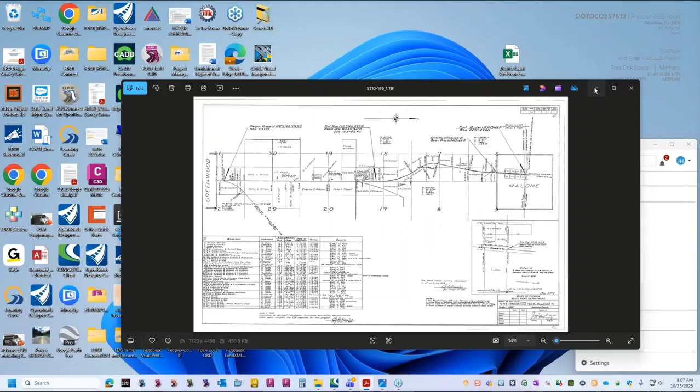So with that, let's see, I'm going to just move this over for a moment. I've got a couple of maps here, but I'm going to start ORD fresh because I don't want it to crash.

While that's cranking up, I'm going to put this up here and talk a little bit about the COGO.dgn. The COGO.dgn is a new file that we added to the 2024 workspace.

The reason we created this particular file is because there's not really a good central place to put your COGO. From experience, we know that you create some COGO points in a master right-of-way file, for instance, or maybe in a jurisdictional model, the township models, or possibly a subdivision.

So you may be doing these in different models or different files and trying to reference them together to put together your map, and come back two or three months later, or have somebody come out behind you and try to look at it, and it's a puzzle where everything is. You find yourself spending so much time looking for where you did what and where it is, that it gets complicated.

And so some consultants have tried using a COGO file and said they like keeping it all in one place. So we're just going to put this out here. This file may be used to develop 2D coordinate geometry for a specific project.

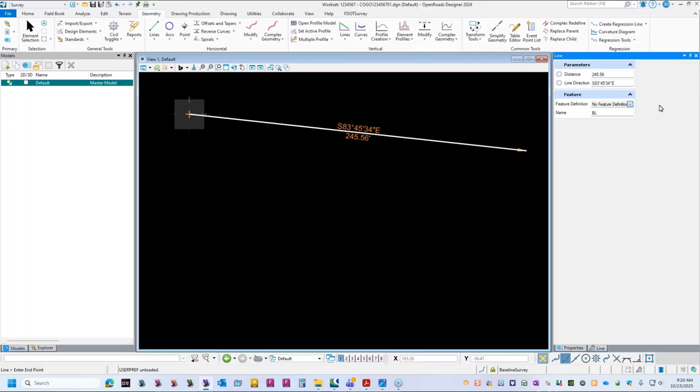So if I go over here and set my feature definition - sometimes it's a little slow - set my line, set my feature definition, I'm just going to make it a baseline for the moment. It does accept names, you can name them 1, 2, 3, 4, or you can name it BL1 for instance, and it will increment from there, or increment from BL. Managing point names and linear feature names is important, but for this process it's a little time consuming, so I'm just going to let it name whatever it wants to name it.

Okay, so I'm ready to draw a line. I can do that by just going right across here like this. And here's a line, a couple hundred feet long.

And then with that, I'm going to place a point. So over on my point tools, if I just select this top point, it's going to place a point. As you can see over here, it'll offer you an elevation mode, a rotation mode - if you want to rotate it, you can rotate it on the fly. I'm just going to choose a monument here, go down, choose from your list, and I'll choose a monument. I'll stick a monument over here, and I want to put one maybe up here.

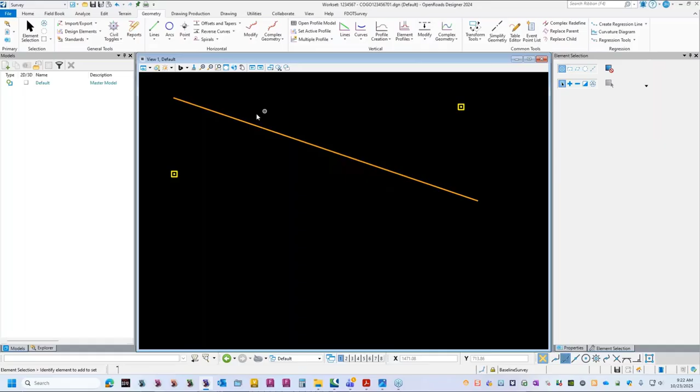I want to demonstrate the concept of move to and what was moved. In this case, I'm going to move this line. I'll select the line, grab the handles... let me do this. Select the line, grab the handle, and move it to the monument.

Notice it puts a little diamond up there, and to the upper left of that diamond there's a small ruler icon, which means I'm setting a rule. That's basically what it means.

If you look down at my button bar, right here, this is an origin snap. If I select that, it'll do the same thing if it doesn't do it automatically—it's going to snap to that line, snap to that monument. So I just moved the line to the monument, meaning the monument now controls the line.

For the other end, I'm going to do the opposite. I'll select this monument right here, move it down, and stick it on the end of this line. You saw it was ruled also.

So what happens is, if I move the line that I moved, it's not going to move the monument. Undo. However, if I move the monument—select the monument, and get to it... it's having a hard time just selecting that monument. There it goes—and I move the monument, notice it moves the line.

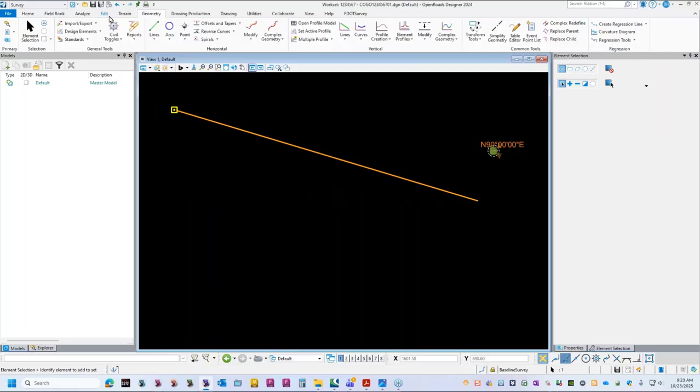Down here it'll be the opposite. If I move the monument, it will not take the line with it, but since I ruled the line to the monument, and ruled the monument to the line, when I move the line, it moves the monument.

One other thing I wanted to demonstrate here was the offset point tool, and I'll just do that real quick. So let's see, I'm going to put a point...

I'm going to use another tool called Civil AccuDraw to do that. So here's the Civil AccuDraw, and I normally dock that up here.

Another tool I wanted to mention is the Feature Definition toolbar. I usually dock it right here and leave it up top, along with the Civil AccuDraw. The Feature Definition toolbar lets you set the feature definition for what you're drawing and keep it current.

So I can say, for instance, put it on baseline, and if I select my line, it'll say I chose baseline over here. But if I turn on 'use active definition' over here, notice it grays out over here, so you don't need to choose your feature definition there.

It's in your toolbars now. These are for linear elements, and it'll affect things when you least expect it, so pay attention. If you have this turned off, you can set the feature definition here. If you turn it back on, it takes it from this spot.

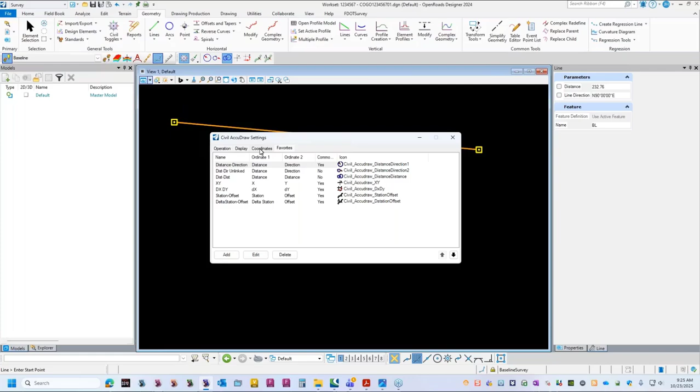You can actually add some custom settings, like offset, for instance. I'll close that. It has some other tools: a distance direction tool, a distance direction unlinked so they won't dynamically link to each other, a distance tool where you can just place a point, one where you can place it by offsets, and a station offset tool to place a monument.

And that's what I was going to do right here. I'm going to use this particular tool and hit point, and now it wants to know the station—but it doesn't even know that I have anything out here.

So what I'm going to do is create this baseline feature into an alignment by starting a station here. I'll start the station at 0, and just make it 10 plus 00 for now. So it's a stationed alignment now—if I look at it, it'll tell you it's 10 plus 00.

This is large because I set the manipulator settings to 1.5. Otherwise, it'd be little bitty.

And I'm going to use this tool again. So where's the station? If I hit the O button, the O is the origin button, and I'll hit O. It says select reference element to reset to return to command. My reference element is going to be this alignment.

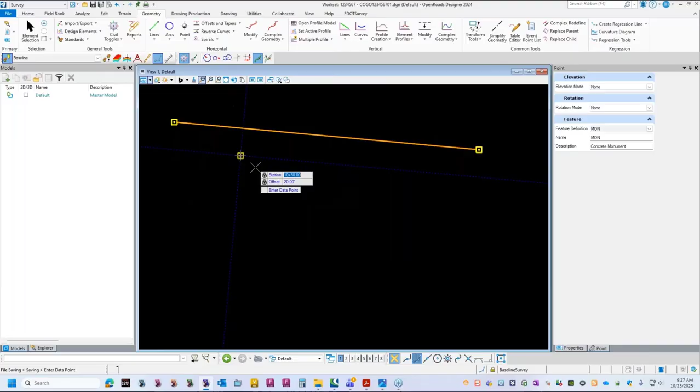So now it puts these guidelines and asks where on the alignment you want to put it. I'll put it at, maybe 10 plus 50, and hit enter, and it'll lock it. If I want maybe offset 20 feet, it'll lock that. As soon as you move your cursor, it locks that place, and I can put it there. Notice the dynamic link to this alignment.

If I don't like the 20, maybe I'll change that to 30. So just a demonstration of some of the dynamic links that ORD does and how it works. You need to be cognizant of it, because these can help you and they can cause you problems if you're not aware that they're happening. You may have an alignment that you move that has all the points linked to it, so the points will go with it. On the other hand, they may not be, and you think they are, and next thing you know, you've got a mess.

All right, so open roads models is one of the things I wanted to mention. If I go over to my Explorer tab down here, bottom left, I've got my Explorer ready, and I go to open roads models, you'll notice I have some points, and I also have an alignment. There's the alignment, and if I select it, it actually selects it, so it's another way of selecting.

But you can see I've got some points out here. Sometimes it takes a little bit to update these points. I've noticed my point 1, my monument point, is missing, but coming back and forth you'll eventually see it. And those are, let's see, so that's the open roads model.

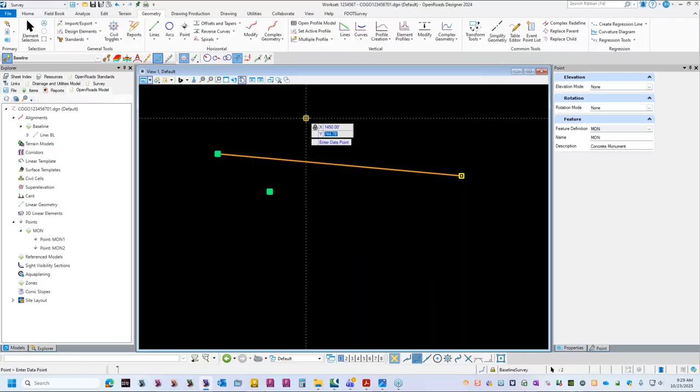If you're not using it, you want to keep it off. Oh, by the way, the one other thing I wanted to mention on Civil AccuDraw is this one right here. I actually had a consultant say there's no way to put a coordinate in ORD. Well, certainly there is. If you have Civil AccuDraw located, you choose this XY coordinate, and you can type in a coordinate. So I can type in 1450, hit the lock, 750 for instance, and it's going to put it right there. So that is a way to type in the coordinate.

You can also copy and paste from, say, an alignment report right in here and put all your points out and build your alignment, for instance. With that, I'm going to delete these points and this and the chain. I'll turn off Civil AccuDraw, and I want to talk about another tool called the Geometry Builder.

It's right here, this is the geometry builder. Going across from left to right, you can open a file, you can save a file, you can save the file as. This is where you add new geometry. These I call events, geometry events. You can copy and delete those events, and that all affects over here.

Going across, let me go ahead and just hit this tool. Whenever you start a new geometry event, I'll select this. It'll place this up here and get your lines and everything ready to go. Note that you can put multiples, I could have as many geometry events as I wanted. And if I had data in this particular event, or say event 4 for instance, I could hit copy and it would copy it exactly. So you can also delete them and just have 1 or 2.

In this case, I'll delete it down here and I'll just name this SR 71, State Road 71, for instance. Going across this direction, this is where you set your bearings in degrees, minutes, and seconds, as opposed to decimal for instance. And here's your units.

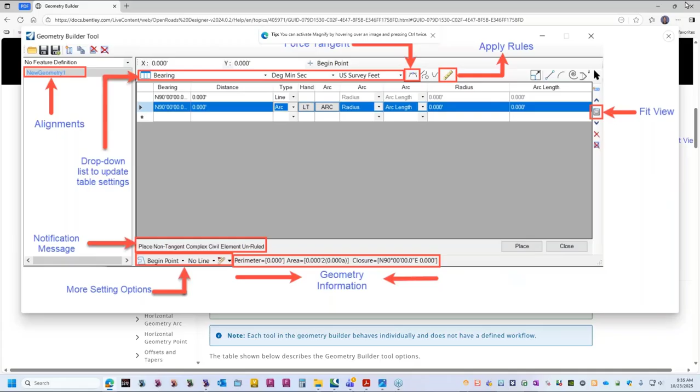So I'm going to close this help, just to show you that that's where you can get some help.

I'll come back over here, and the next thing I was going to do is review right-of-way maps, State Road 71 and State Road 164, and I have those right here. I'll start off with State Road 71, put it up here. It is a north-south - if you look over here, here's the north arrow right here, and it's moving north to south, and I'm going to rotate it back, just make it easier to read.

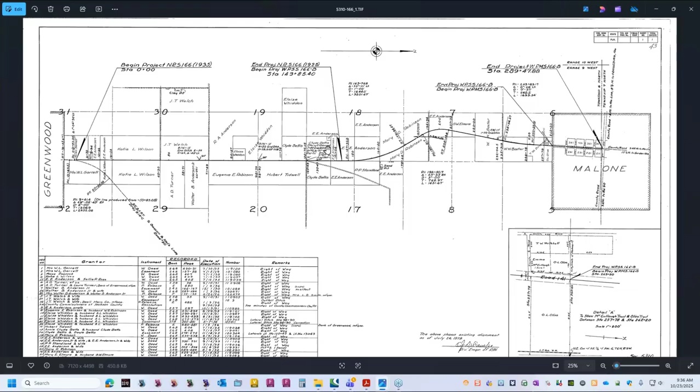So there's your north arrow going to your right. We're going to begin at this project beginning right here, this begin project, station 143.8540, and you'll see that it immediately goes into, just a few hundred feet away, a point of curvature, 147.32.3, and then it has curve data, more PTs and PCs for tangents, and more curve data all the way to the end.

One of the things I wanted to note on this, I'm going to bring this up to show you - in this map, there's an error. It's hard to say exactly where the problem is, but if you look at this particular curve, you see 190 plus 81.7. So I'll put in 190, 81.7, and I add to that the tangent length, 762.97. 762.97 equals 19,844, or 198.44. He has 198.50.7.

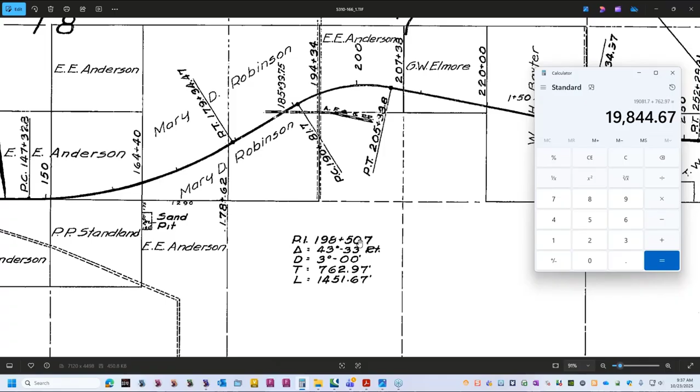So there's about a 6 foot, 5.5 foot... well actually it's about 6 foot because this is 7.2. So you're seeing a 6 foot error in here, and I'm not quite sure it was.

What happens is, as you move forward in this map, you're going to end up with a problem at the end station. It's something we could figure out, and probably would need a little field work, and there's been some field work done out there. So that's all probably been reconciled at some point, but we're going to be taking off here near the PC of the curve, so that error is not going to really bother what we're trying to achieve here.

So what I'm going to do is take this map and start off in Geometry Builder and put in these calls. Let me close this.

So what you'll see is it says bearing. Well, I can put in quadrants. I really like using quadrants, I used them in my early career when we had calculators that did everything. So quadrant 1 is northeast, 2 is southeast, quadrant 3 is southwest, quadrant 4 is northwest. So if I put in 4 northwest space 45, 0.30, you can use decimals - let's say 30, 50. It's going to say north 45 degrees, 30 minutes and 50 seconds west. So it's really good at reading quadrants.

In this case, I want to go northeast, so I'm just going to go straight north - I'm just going to put 10 and it's going to be north. And I'm going to take this station here. Let's see, where is that station? Let me pull this over here and look at it. So we've got a station.

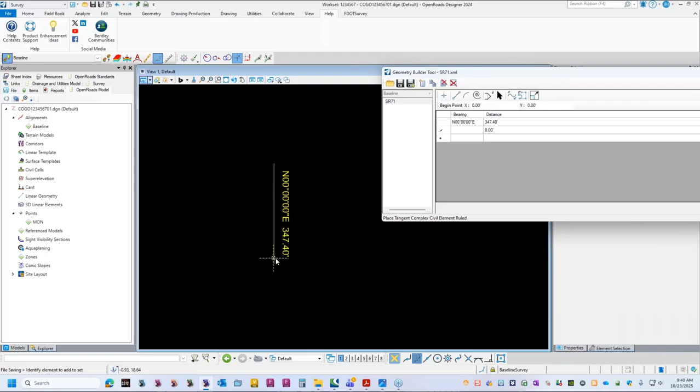And if I hit center here, it's going to center right there to this line, and you'll see it's starting at 0,0. Now notice this is not - if I select it right here, it is not. And I'm going to turn this graphics off just for a second. I'm in the decorations, just show it right here. So if it's here and I select it, it's going to highlight the color that's in that Civil View options, which is purple - this magenta color, and not magenta, but yeah, magenta.

Anyway, so if I enable the fit view, it fits it totally to the view. So now what I'm doing is...

I want to go into a curve, so let me show you this curve data. I'm going to go in here to 147.32, and I'm going to go a curve to the left. And here's my curve data right here. Okay, so let me pull this back aside just for a second.

So what happens is when you put in a curve and I drop this down to arc, it's going to compress this line. It's going to put all the possible curve data right here, and it's going to move my bar up to somewhere around in here. So I'm going to hit arc - you see it moved it, it put in all the top. My curve is going to be to the left, so that's correct - it's arc. You can put in chord or arc rules, but we're not a railroad, so we will use arc.

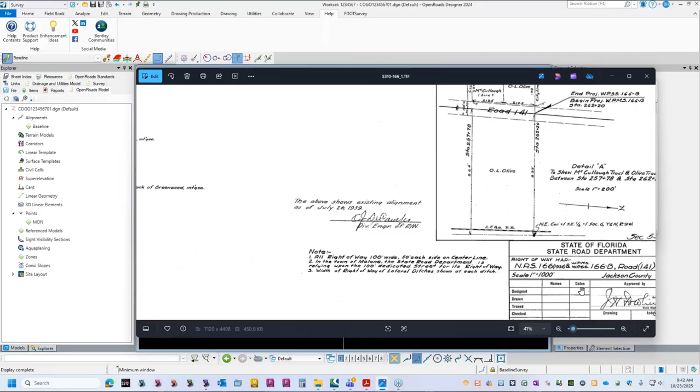And I'm going to put in a radius. Actually, what I'm doing - if you look, I don't have a radius. I'll talk about this just for a second. So this map was done in 1935, right there - okay, they didn't have the tools we have today. It was not easy to do these calculations. They had log tables, they had what are those, the rulers that they used, and they would come up with a really close estimation of these to a reasonable decimal point.

That's why on these old maps you only see degrees to the nearest minute, because they just could not calculate those seconds. You'll also notice there's no radius, because that was just about impossible to calculate accurately in those days.

In fact, the way they would build these curves, the party chief would come down. This may be a dirt road at some point, and he'd be set up right at the curve of the dirt road, and he would backsight down the tangent, and they would cut line all the way down this direction.

Then they would go do the same thing over here. They'd set up, backsight, turn 180 degrees, and cut line until they found the point of intersection of this curve between those two lines, then set up there and look both directions.

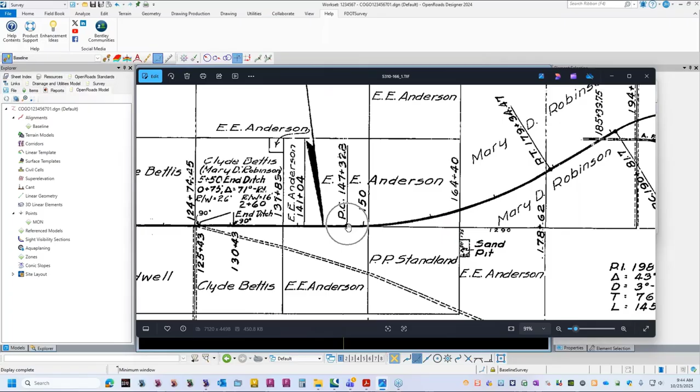That would establish the central angle of the curve. They needed a tangent distance too, so that distance from the PC to the PI where they were set up would be the tangent distance, and you can bet it was somewhere in the 1644 distance, and in the office they bring it back and make it 1644 even. That's a dead giveaway that it's a control type number, that it's a zero.

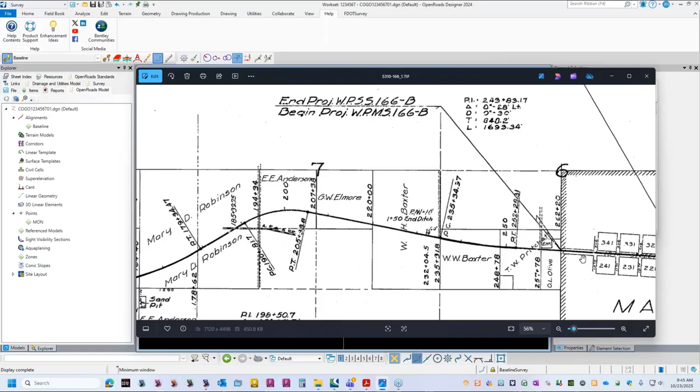Also, they would do the central angle. That probably is a control type number too. I'm going to put in - but to get to this station and make it work accurately, it needs to have the arc length to match. So I'm going to use the tangent and the arc length to build this curve, and that's the way you'd do it in most of these old maps if you don't have all the data you want.

And it's a good way to do it at any time. So instead of arc length or radius, I'm going to change this to tangent and leave that at arc length.

And so I can put in the arc length here - no, that's the wrong one - 3201.67, that's for the arc length.

And then I'll go over to the tangent and put that distance in as 1644 even, and it's going to calculate my curve and then go on to what's next.

So what it did was, if I highlight this curve, you see it's got it right here, and it'll tell me this is where I am. Now notice this is not plotting on the screen - this is like the GEOPAK visualization. This is a proposed graphic that you would put out there.

That brings me over to this tool right here, the remove tangent restriction. So this is forced - if I take it off, it will not force tangents coming out of that curve. That curve comes out because I have a forced tangent on right here. Otherwise it would not have known what direction to go.

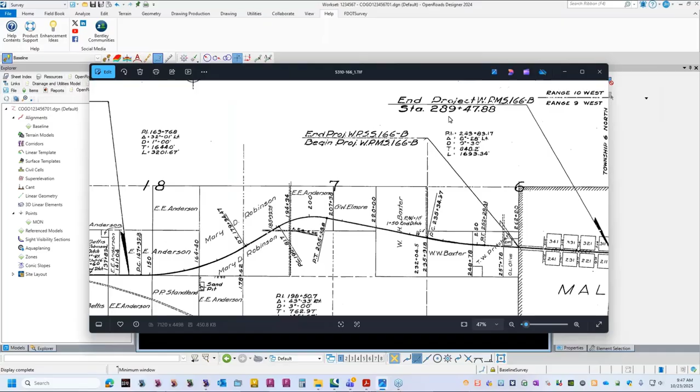The next row here, I just need to put in these stations, so I'll do that and read these stations to the side. So I've got a 190, 81.7 - oh, that's not the right one, I'll make that a second - I've got a 205, 38.

Sorry, I was right the first time - 190, 81.7, and I'm going to subtract the PT station, which is 179, 34.47. So that's going to be a line, and I put that in, hit enter, and it's going to give me that 1147.23 feet. So now it's going to put the next one.

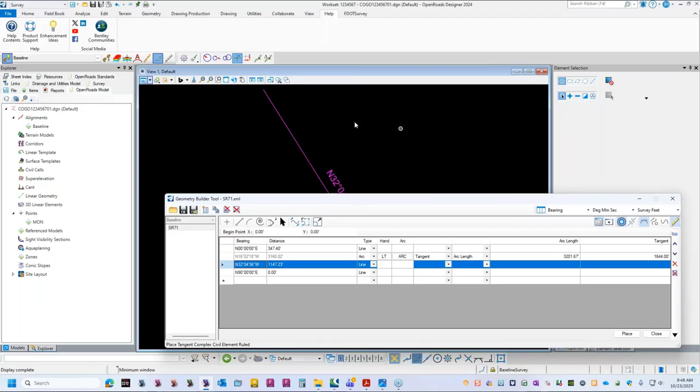Notice if I highlight it, that's where it's going to show - right here, it'll show my latest call. So notice wherever you put the highlighter, that's the call it's showing. And as long as I have this on, it'll fit it to view, or I can center it right here on this particular line.

So what I'll do is continue through and go to the next curve, and it would be 198.5. So let's see.

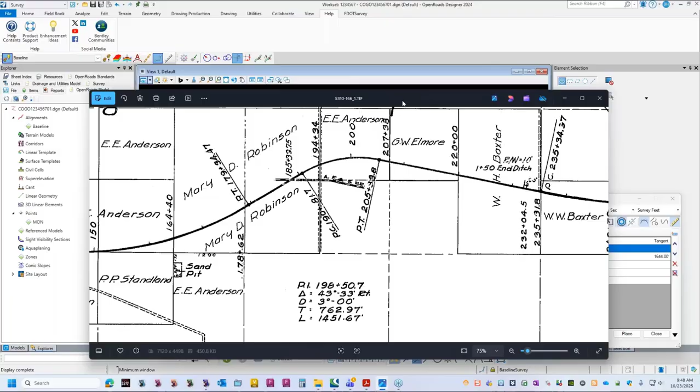So I'll just do this one real quick. Let's say this is going to be a curve, an arc, and this time it's going to be to the right. I'll make this a tangent again, with an arc length. So I'll put in my arc length.

It's 1451.67, and this is the curve that has a problem. We're not sure exactly how this is going to turn out, but the tangent length is 762.97. I suspect they probably used the delta to do this if they messed up. But I'll hit tab, and it's going to put that next arc in here.

This is where I want to talk a little bit about what's happening with this forced tangent. So let's say I'm going to reload this data from a file, since I've saved it to a State Road 71 XML file. I'm going to kill this data for just a second and show you one little trick you can do on a new event.

I'm just going to draw a line right here and let it insert, then draw another line here and let it insert, and then do an arc off that. Let's draw that arc right here, for instance. Okay, escape out of that. So I have it drawn, but let's pretend for a moment this arc is not tangent.

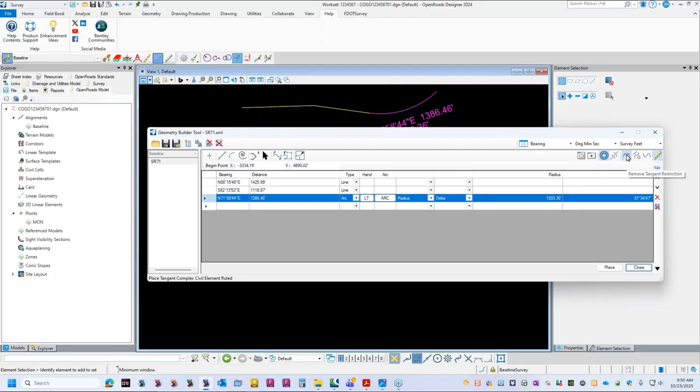If I make this a 0, say I want a tangent arc and I want it to hit right here. The trick is you can go align the tangent direction, make it 0, and it's going to put that arc there non-tangent to that curve. So it's a neat little trick of creating a non-tangent curve when you have these tangent restrictions on.

When you take them off, it'll actually change them. So if I pull them off, it's no problem, but if I put it back on, yes, without this line. So what I would do is come in and say, okay, I use this trick line. Now I'm going to remove it from the list and watch what happens. You see it move, and it would not have moved if I had not turned this tangent restriction back on. So this can mess up.

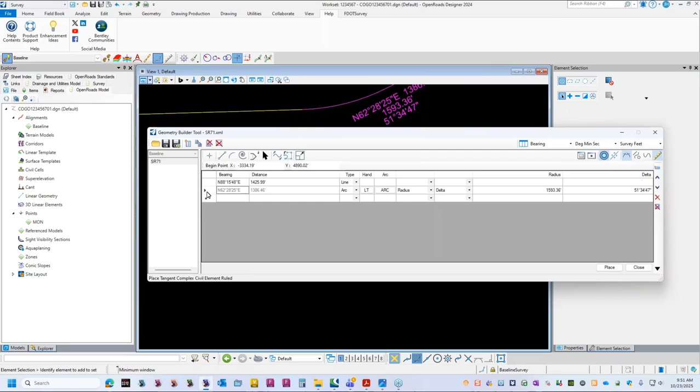So if you're putting in a deed that goes down to a non-tangent curve, be careful not to have this restriction on when you remove that zero length line used to force that tangent. It's a little bit of management, but it's something you need to pay attention to.

Okay, so I'm going to kill this, delete all, and go back, and notice it still says State Road 71. I'm going to be careful not to overwrite that file, although I haven't really saved it yet. I'm going to open a new file, and it says do you want to save changes to this file? No, I do not, because it would save it to State Road 71. So I'm going to open State Road 71 unrotated, something I already have in this file, and you'll see now the name changed.

And now I have in this the entire length, and if I hit this fit to view, you'll see the entire alignment as it goes. Now it is down there. It's actually at a distance. I'm going to put it at 0,0 just for the moment, because I'll show you a couple of things.

Let me zoom in on it. Okay, so it's down here. And I want to talk a little bit about these last three options here.

You have a ruled civil element right here, and create an unruled civil element. So this is how you would go about creating your alignment. You would use this thing. It would use baseline survey, but notice it's grayed out - I can't change it. That's because this is still on. If I turn it off, now I can change it to whatever I wanted, if I wanted center line. But if I turn this on, it holds it. So you just be aware that these tools work with each other.

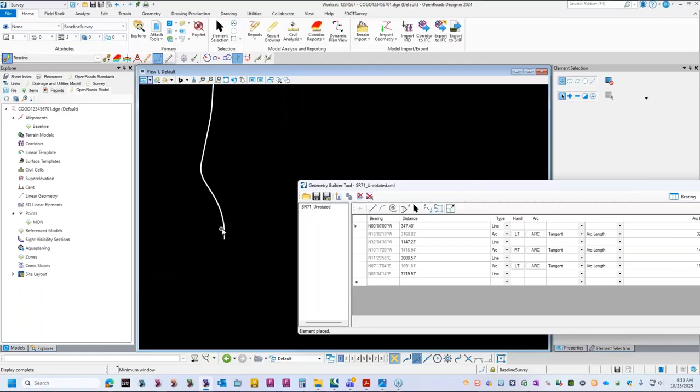So I'm going to place it at 0,0, and it's going to be on whatever active level I have, which happens to be baseline survey. So if I hit place, it's going to place this starting at 0,0. Select it, look in my properties dialog box - you'll see that it is a complex chain.

Another thing I could do, I'll tell you what, I'll just dock this for the moment and work up in here so you can see what's going on.

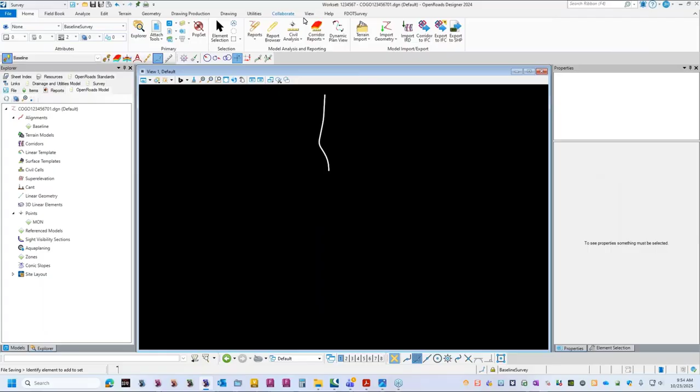Okay, so the next thing I'm going to do is go over here and take this off just to see them. Unfortunately, I'm going to have to close this and bring it back up. I'm not going to change those. I'm going to go back to geometry, bring up my geometry builder, and it's still there. Notice it will open the last file you've got going, but I'm not going to do that on this one. I'm going to use graphic line, and I'll turn on simplify or create complex elements.

So what this is going to do, I'll start here and move it a little bit. It moves it dynamically, so you can place it wherever you are. Once you hit that begin point, it's going to follow. I'll just put it over here for a moment, and notice what it did - it created it, and now I've got to hit the place button because it's not actually on it yet. This time it created individual elements because of using that tool - you see arcs, chains, lines, etc.

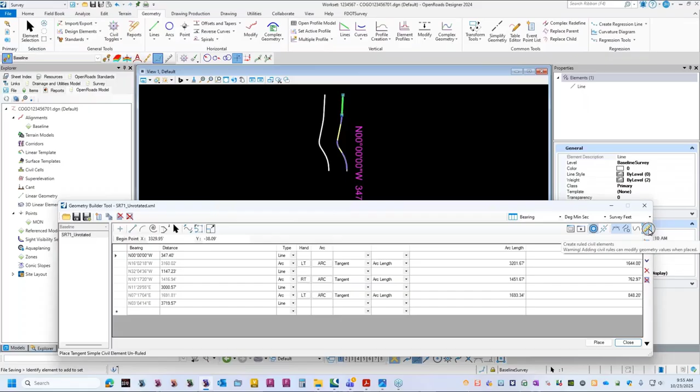The next thing I'm going to do is the ruled element itself. It's not going to be graphical, so it's going to put my ruler back up there as an option. I'll begin my point over here, and place. Now it places my alignment the way I want to see it. If I select it, it's going to show you an arc, State Road 71 - this is an arc. Oh, I had these on right here, which means you can place these ruled or unruled elements as pieces. Let me turn that off, do it one more time, move it over here and place it. This time it is a complete complex state road element, and it shows you.

And when I talked about those dependencies, it's these kind of things - see, there's an interval here. You get down in here, and this is where you will end up with a default element if you don't look out, and then it'll fail QC.

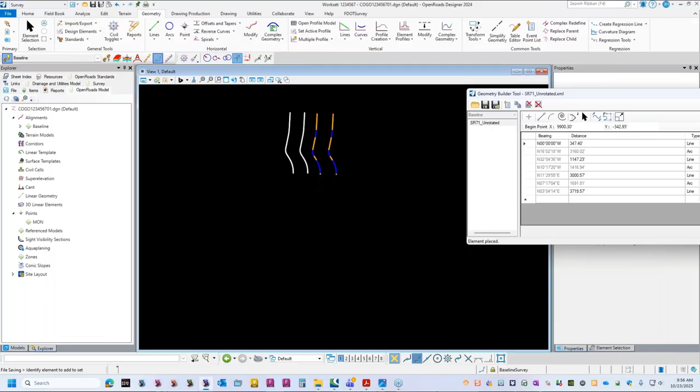So the next thing I want to do is actually move this. I'm going to delete these, and I'm going to turn on my street background. It's no longer here - I'm looking under my view setup. Where's my street background? Well, in 2024 they have changed it. It's over here, here's your map type. I'm going to put on this, it's the street view or road - they've changed the name from street view to road. You'll see where it is - it's out south of Louisiana, in the Gulf of Mexico, but we want to be over here somewhere.

But this alignment goes from near up here - you can see it along State Road 71 to Malone, then it cuts over County Road 164 to Bascom. So we're in the ballpark here. I can go over here and select this and put it, kind of matching it up here, based on about where that road to Bascom goes. Put it there, and I'm going to hit place - so I've got that placed now.

Let's see, is there anything else I wanted to do to this? I'm going to put a few monuments on it - that's probably as good a time as any to do this. I'm going to close this, and I'm not going to save it because I don't need to at this point. I would save it for the coordinates, but it's already saved in a good spot.

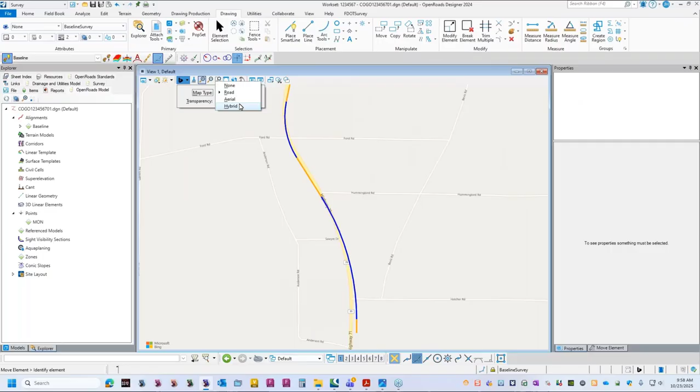I could probably move this over just a little better. So what I would need to do - if I can't move it, I go over to drawing and hit move and go down here, it's going to say no, you don't do that. Let's do this a little better - we're going to change this from road view to aerial, and we'll place this a little better. You'll see the aerial view doesn't match too good. Actually, this PC should be just above this road - I know that just from working with it previously.

So I'm going to use the geometry tool to go over and use the transform tool - this is one of the tools also I mentioned. It's going to give you a warning that you could mess things up. Yes, and if I look over in my transform elements tool, you see it's got some functionality. This is a copy, but essentially this is a move, and you can copy if you select that.

And here is a rotate. If you want to do that, you can scale and transform the Z elevation. I don't have any Z's in this file, so I'm just going to move it by cursor point, which means I can just grab it and pick it up and go. So I'm going to do that.

Let's see, transform, select it, on. I'll grab it right here at this intersection and put it up. It's going to be probably somewhere up here, somewhere about like this, and it moved the entire alignment.

Okay, and I want to put some monuments on it, or put some calculated points. So we're going to go back to this point tool right here, point. And if I turn on my Civil AccuDraw, I can use origin, and oh, it's not going to do it there. I have to do the station offset.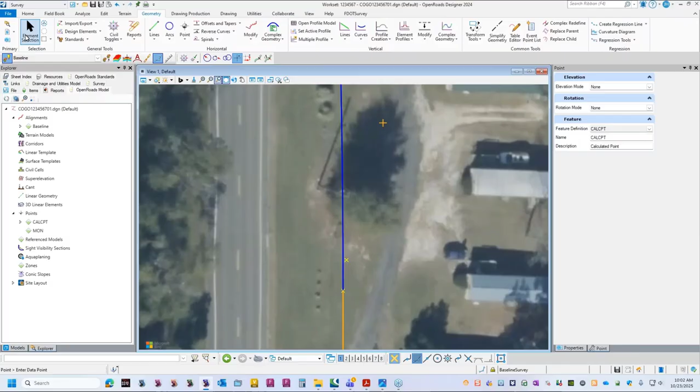I put those on there. Do I want to put any more points on? I could put a point at the center of the curve, just as a mark, just in case I need it. I'll put one down here also. And somehow, I actually saw it happen, I put an extra point out there.

So what I want to do now is look at another map that intersects this one. So let's look at this map here, let me pull it over here. This is County Road 164. And what you're seeing here is State Road 71, and you have a station on State Road 71 where this county road comes in to intersect. It starts at 9+54.

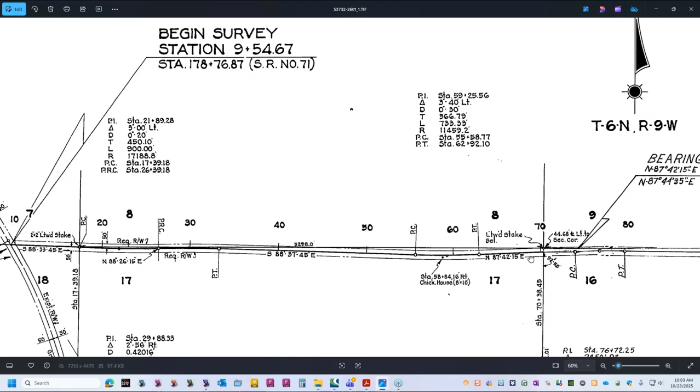Just a couple of things about this county road map here: it does have a bearing, so I finally have a bearing base I can use. Okay, and then it goes directly in a curve to the left. And as I move down here, nothing really unusual until I get a bearing equation. What that means is this is a non-tangent curve. It's telling me my tangent bearing is 87-41-35.

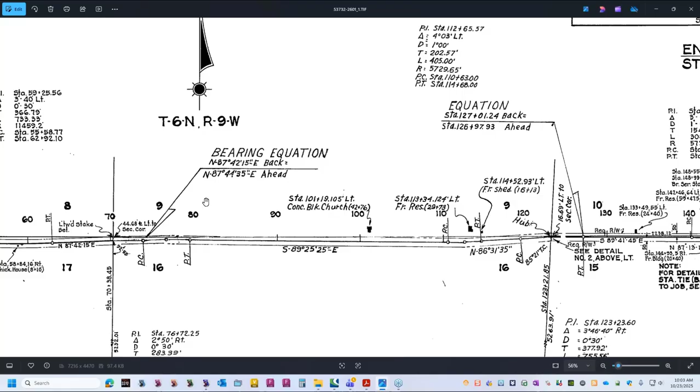Okay, and I have to use that in order to end up with 89-25-25 here in the southeast. So what happened is I did exactly what I talked about: I put in this 87-41-35, 0 line length, and then put in that and left the force tangent on, which pushed the curve in the direction it's supposed to go, and my out bearing was exactly 89-25-25. So that worked perfectly. And then I went back, turned off force tangents, and removed that particular 0 line length.

Okay, another thing you'll see up here, it goes through some curves and tangents till you get to the PT of this curve, and there's a station equation. A little bit unusual because it's 127.0124 back, but the station ahead is actually less than the station back, it's 126.9793, which will actually give you 2 different 127s for this alignment. And then it ends up here at 149.32.

Okay, and so what I would do is go back to my ORD, and I'm going to turn this aerial off for the moment.

I would go to my geometry builder, it's under geometry right here. It's still up, and I'm going to delete all this. I don't need it anymore.

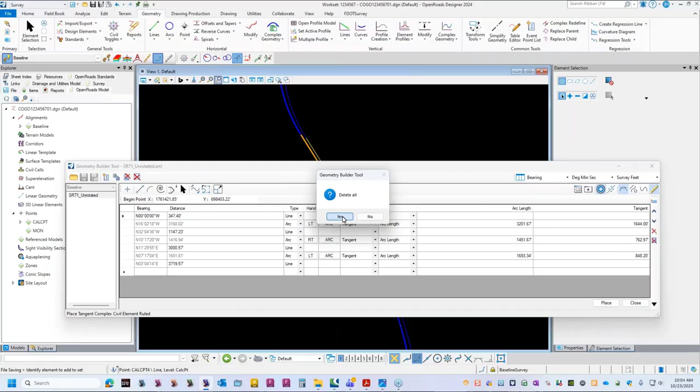I'll say delete all, though I don't even have to. I'm going to open up a new file, a new event right here, and I'll call this one CR164. CR164.

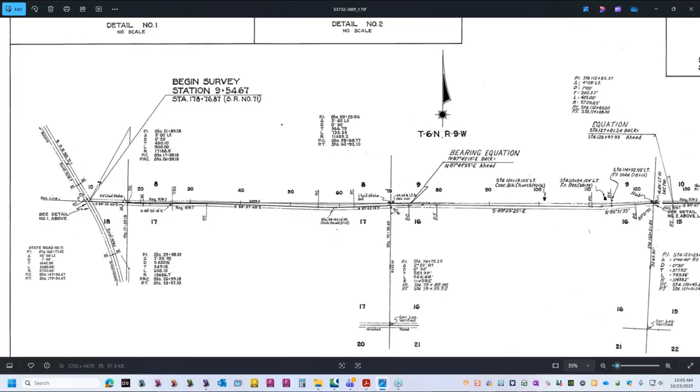I would start my geometry builder just like I did the other one. Let me go find my map here. It says I want to start at 178 plus 76.87. I need to locate that station and a point at that station on State Road 71. So before I start, I'm going to do that.

I'm going to turn on Civil AccuDraw because I'm going to locate it on an alignment, and I'll just hit point. It asks where I want to put that point. I want the alignment to be my origin, so I want to put a point. Let's see, point — oh, I don't want to put a point XY.

I don't want to put a coordinate in, I want to put a station offset in. So it asks what station. I can't choose my station very easily graphically without doing some COGO, but if I hit O and select my alignment, it ties me to that alignment so I can put in the station. I'm looking over here on screen for what the station is.

So I can put in 178 76.87 — that's 178 plus 76.87. Hit enter and it locks me to that station. Then I put in the offset, which is 0 because I want it right on the line. So it's 178 plus 76.87, 0. There's only one problem here.

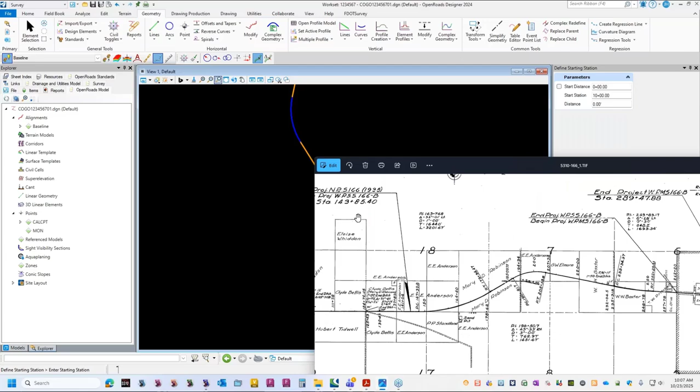Turn my Civil AccuDraw off, 0, and my station for the beginning of this alignment was right here. It was 143 plus 85.40. Let's do this again: start, locate element, 0, and I'm going to put this as 143 plus 85.40 as my station. If I select it now, you'll see 143.85.40 is the beginning of my alignment.

Now I can put that point on the station I wanted, which was 178+76.87. I'll go back up, turn my Civil AccuDraw on, turn on point — I'm still oriented to this because I never turned it off, so the origin is still this alignment. Now I can put 178 plus 76.87 and hit enter, and it locks me to this spot. This is where station 178 is, and I wanted a 0 offset, so it locks me to this spot. I'm going to place that calculated point.

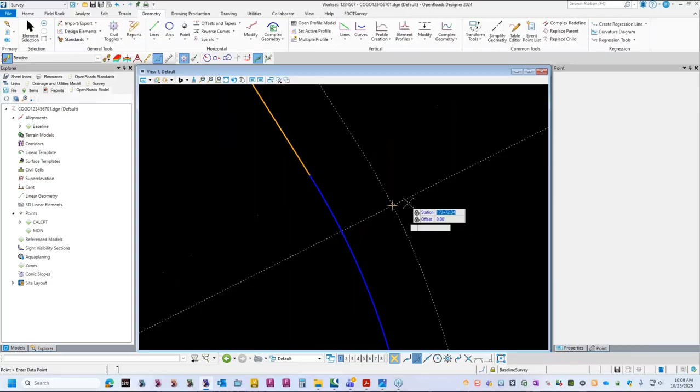You can see it's still calculated over here, and it'll just increment that number. Left click, and now I have a point. Now I also have a point to start my County Road 164 alignment, so I just select that begin.

Now I can turn my Civil AccuDraw off. Select begin here, select that point — it gives me that coordinate, and then I can take off at the direction and distance we were looking at, which was south 88.33.45 east, so southeast, quadrant 2, 88.33.45 south 88.33.45 east.

The distance would be the PC of the station, which would be 1739.18 minus my station 954.67, 954.67, and hit that — 784.51 feet is the first call.

Then I jump into my curve and do the same thing I did before. Eventually I'd get down to this point, and then put in a line at 0 line length right here, and continue on with this curve data, because it would force the tangent to be along that 0 line length bearing. I'd end up with south 89, 25, 25 east. I'm not going to take you through all of that.

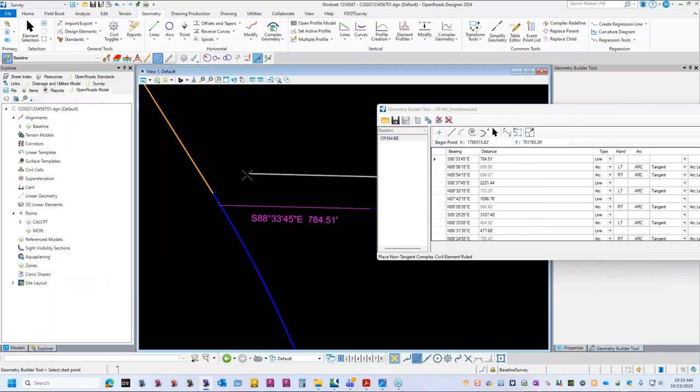Just to make sure it's going to be on that point. You see the last time I did this, it's at a different point, but I'm going to put it at this point right here.

So now we are here, and I can rule it and place it. Notice that 89, 25, 25, that zero line length would have gone right above this 89, 25, right before you get to right after this arc. Or right before this arc, actually. So it would be right before this one, right after this one.

So you can see I've turned it off, and I've also turned off the tangent, the forced tangent restriction, because if I turn it on, it's going to change. This will no longer be 89, 25, 25. So I got to be careful not to do that.

I'm going to go ahead and place this as a baseline and say close. So it should have placed it right there. It did. I'm going to close this. I'll save changes just because I just changed that coordinate point at the beginning of it. So I'll save those changes.

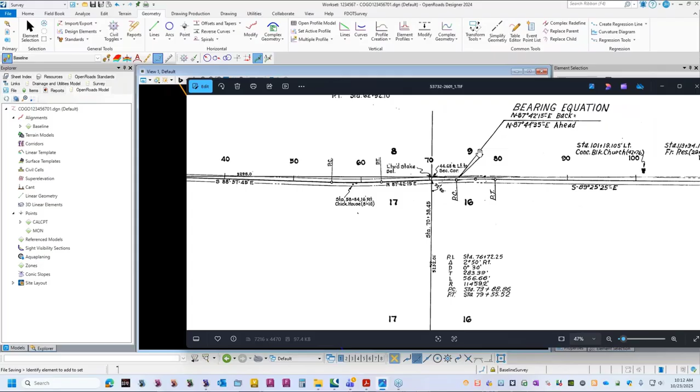So now what I need to do is tie these. They're tied together by station, but they're not tied together by angle. They're just totally guesswork. So I can look at this right-of-way map, zoom in here, and it tells me exactly how that surveyor tied this together.

He came down here, he went down his cut line, he found the section line, he found the section corner, so he actually went between this section corner, and I've looked at these notes for this township, and yes, this is exactly what he did.

And he backsighted down this section line and found the PI and measured it and set up on it right here. On his tangent, he measured it at 57.8 feet, and then he turned an angle down the section to the section corner, and it said 122 degrees and 32 minutes.

And he also, so he comes back in, and I'm quite sure he did not measure this distance. He calculated this 121.50 is the angle that the section line makes to a tangent, a line that is tangent at this particular point, okay, which would go up here somewhere and come back this direction, right?

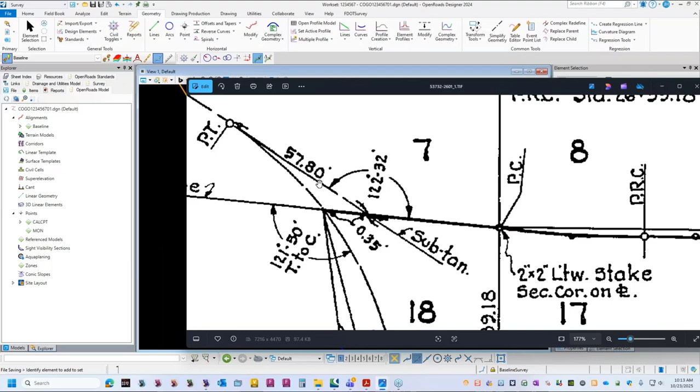So I've gone through his notes and looked at him. He does, it's something he does. It's just this party chief does it this way. You got to watch him though, because he actually made a calculation error on one of his next setups down to a little bit to the south of this. So he had 3 pieces of data that were correct, but 1 that was wrong, and it was just a typo.

So what I want to do is I want to put in this point and match this 122.32. Right? So I'll put this aside, and I'm going to do a little bit of locating. So I'm going to use this locate point, and that's over here. And instead of traverse, I'll just do a radial.

And it's asking me, well, what method do you want to use? It asks right there on the screen. So I'm going to set radial, and it's going to select the occupied point. Well, the occupied point is going to be this point right here. Select the backsight. No, that's not. It's not going to be that point. I got to start that again.

Okay, so we're going to start at radial, and this is where his occupied. I'm going to occupy this point, and I'm going to backsight this point. And you notice it's putting them up there along with the name, and it's asking me an angle, and so I'm going to put 180 degrees because he turned 180 degrees, and he went 57.8 feet.

57.8 feet. And select it, and I'm just going to put a calculated point because a monument, it looks good, but it kind of gets in the way when you're looking very close. So I'm 180 degrees, 57.8 feet, and this is really nice how it does this. It shows you your point, it shows you your backsight, and it shows you your angle that you turned, and it shows you how far you're going. And all I got to do is left click data to accept a point, and I'll do that.

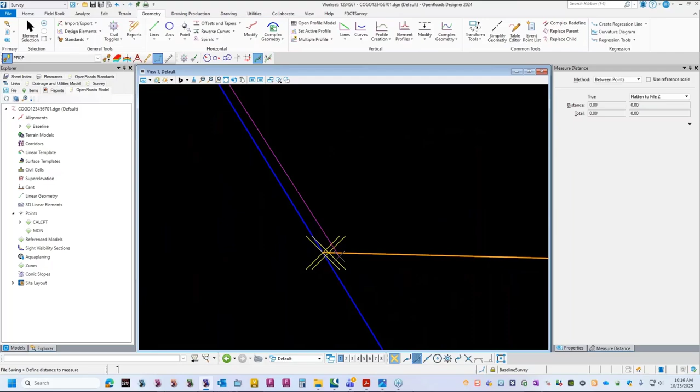I'll start at this point, and do I have it over here? Just make sure between points, and I'll go down to this point, which is where I set my property line using active feature. Yeah, okay, I'm good.

And I can see if I select it, it'll tell me the distance on this thing, 57.8 feet, and it gives me the bearing. Okay.

So what I'm going to do is look down here and go, okay, what I need to do is I need to match this line here. I need to make this angle to be 122.32 feet. 122 degrees and 32 minutes.

So I will use this tool to look and see what it is. Just real quick, let's see if I go to drawing and use this measure angle tool. It's a nice, easy way, because it shows the two directions you're going right there, and it tells you that angle is 123 degrees, 30 minutes, and 51 seconds.

So I'm going to have to do some rotating and translating here to get that angle to where I want it to be.

What I have done before, I've moved the County Road 164, but in this case I'm going to rotate State Road 71 because it's the furthest away from the aerial. If you notice, it's out of place, so it'll probably be closer, and plus that way I can hold this bearing on this line.

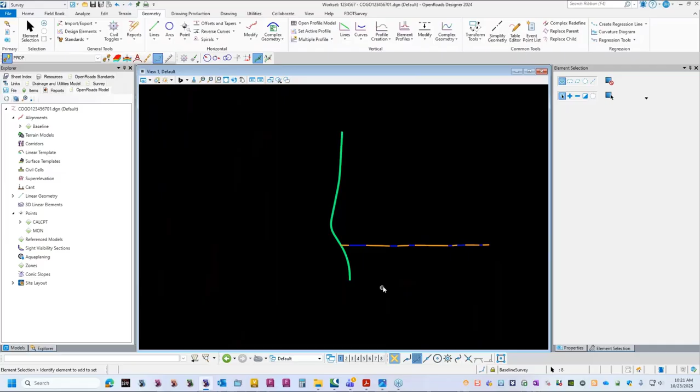I'll leave that there for the moment and select what I'm going to rotate, because I want to rotate the entire alignment and any points with it. Some of those points will go with it anyway because they're dynamically tied to the alignment, but others may not, so I'm just going to get everything right there.

Okay, go to my transform tool. It should remember all that. It does, and it's showing me which direction it's going to rotate. It's giving me a little ghost preview, and it's going the wrong direction.

I want to go to the right, so I'm going to put a negative here. Let me see if I can put a negative here, hit tab, and see what it does. It rotated to the right instead of the left, and all I have to do is left click, and it's going to rotate all of that.

Okay, let's get out of this tool, select it, go back down here, and see what we did. Use the measure tool, go to drawing, measure, select this direction, and look what I have: 122 degrees and 32 minutes exactly.

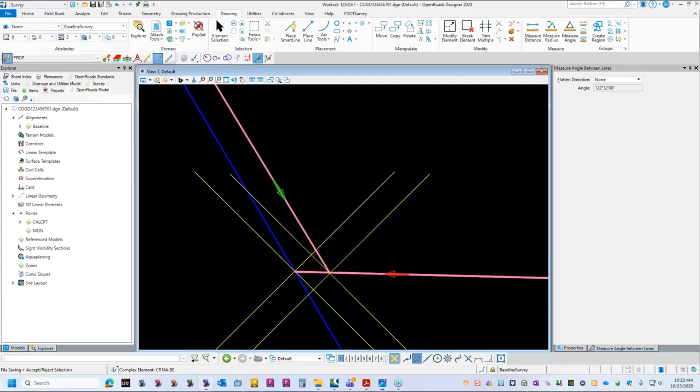So what I've done is tied these two alignments together using some COGO tools. And if I turn on my aerial view, let me show you something else.

We're pretty good, ballpark up here around Malone. We're pretty close to center but not center lining here, and you can see we're rotated the same direction as most.

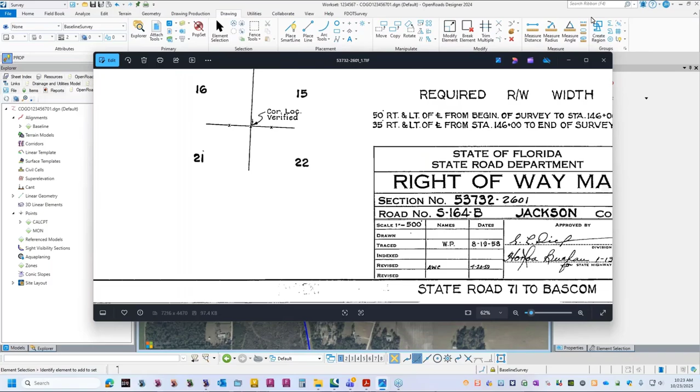So what we've got here is we're using this bearing base of this particular line based on a right-of-way map that was created in 1958. You can imagine the datum was not very well established when this was done.

So for that, I'm going to select the whole thing, all of this, and do another rotation translation—just a little movement to get this looking a bit better.

Now, if we had primary network control—we do have a control survey out there—I'm not going to take too much time to deal with that, but if you have control, you would tie it to that, which would be easy enough to do.

This time I'm going to rotate, but not by angle, I'm going to rotate by just a cursor point. My rotation point is already fixed and still there, so it will rotate about this point. I just need to put a cursor point out there and rotate it.

What I'll do first, before that, is move it to get it in the right spot. So instead of rotating, I'm going to move it—everything that's selected here—and select State Road where the intersection of these points is, which isn't exactly right now, so I should move this up.

Let me do that. So I'm going to use the same thing, but move this county road alignment to this point so it'll be exactly on the station I want. Since I didn't change orientation, this angle should still be exactly the same. Just to check, make sure.

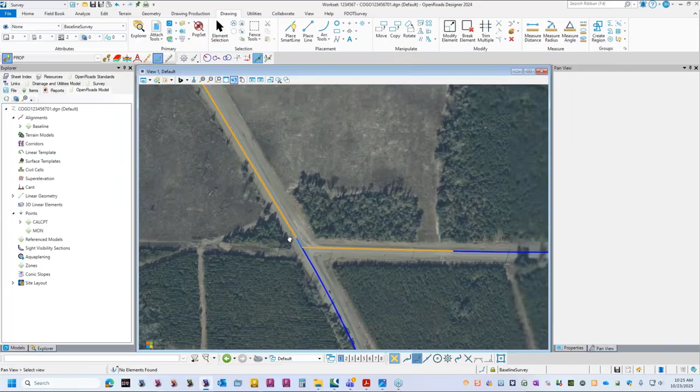122.32, so I'm good. All right, now I want to rotate it. I want to move everything, so I will select it all.

Run down here—now this is Graphical COGO, it's the way it works. I'll go to geometry, use my transform tool, move it. I'll move this point right here, and just do my best to eyeball it to the center line. I think maybe somewhere right about here.

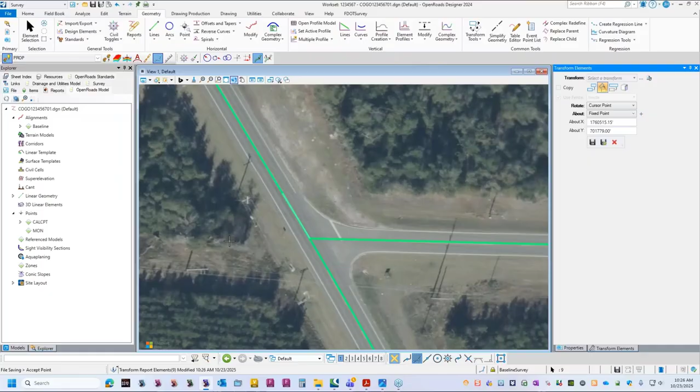This is about the center. As you know, alignments don't necessarily follow the center line, but in this case we'll just pretend it does. So it should move all of that to there, and then I'm going to rotate it still about that same point by cursor, rotating it down so the center of this road will be right about there.

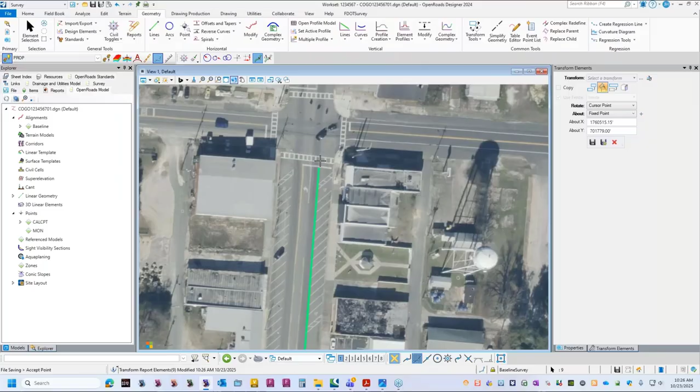And look, it's hitting that center road good. They did a good job of surveying this one. The State Road 71 was done in 1935, and it missed a little bit, didn't quite make it. In fact, we don't know for sure where this is. This road was probably totally different, so this may be off about 6 feet or so. We just don't know, but for our purposes, it demonstrates what I wanted to demonstrate in these tools.

So let's see, I will place a point. I'm going to place it with Civil AccuDraw, by coordinate actually. Let me do this instead, I'll place it by offset. Okay, so it still remembers my origin, I could hit it again if I select it. That's a way of doing that, but let's just do it.

I want not locate point, that's what's causing the problem here. Point, and I'm going to make this a monument, like a concrete monument. And if I do it by station offset - what station offset do it? I want to do it right here, at the PC of this curve. So the station would be here. If I hit enter, it'll lock that station down. If I put 50 feet, it's going to put it at 50 feet.

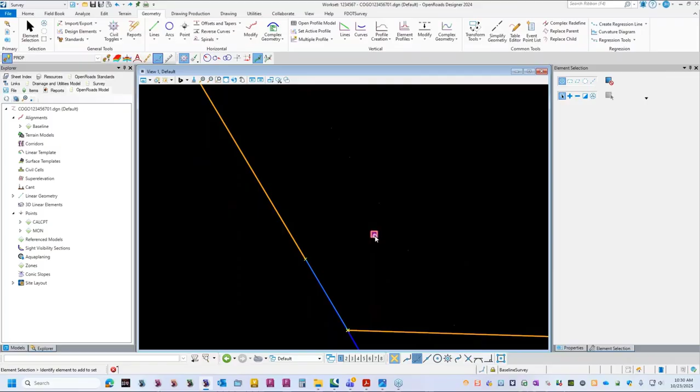I will lock this station down and zero. I know what's happening - I need to reestablish my origin point. There, okay. Enter 50. Yeah, what happened there was I had set that origin before I rotated, so it was remembering the old alignment where it was. That is something I did not expect.

Let's do - we're gonna lock it again, same place, except for down here. I'll hit enter, I'm gonna put positive 50, put a point. There. And it keeps going here to the... on minus. All right, so anyway, let's see.

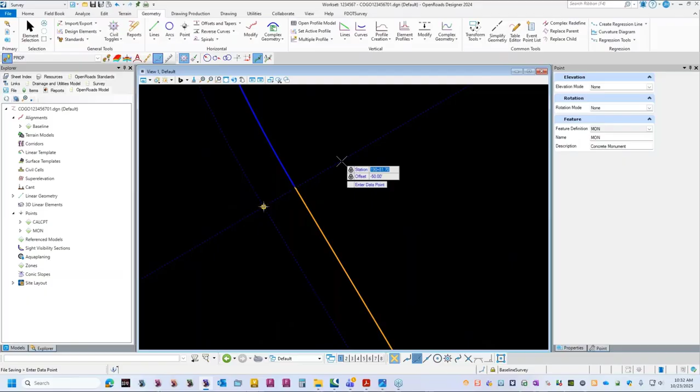Let's do a couple of points up here just to give a guide. Apologize for the delay here. So I want to place this point at this station, hit enter, 50 feet, there, enter again, minus 50 feet, and it's stuck on 50 feet up. Enter, positive 50 feet. It keeps going, not quite sure why it's doing that, but I did what I wanted to do.

Okay, so I want to do a couple of other things here. I want to monument that, and show you - let's see if that's this at this point. I want to monument it with Civil AccuDraw, and use the locate point tool. So yeah, that's where I thought it was. So I want to use this locate point tool. When we turn AccuDraw off, here you go, and do this point, locate point.

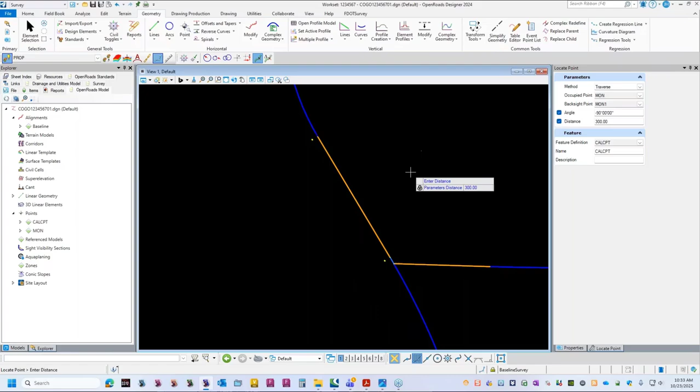And I'm going to do this time, traverse. Okay, so it's going to ask me traverse, what point. I'm going to occupy this point, backsight this point, I'll turn minus 90 degrees. I'll go out there about, well, I'll see minus 90, about 300 feet, something like that. And it's going to tell me to put a point right there. Let me put a calculate, let me put a monument there.

I'll put a rod this time, and data point to accept. It's going to put that. Now it's traverse mode, so it's asking me again, what do you want to do? Well, I want to do minus 90 again, but this time I'll do about 150 feet, something like that.

And at 90, left click, so it's going to go there. And then I'll do the same thing again, but I'll go back to 300 feet. Oops, I didn't place my point. Let me go to 250, enter, and left click to place the point. I ended up hitting an extra one, but that's okay.

I'm going to go back to my tool again, traverse, select this point, minus 90, I'll go 300 feet, and place it there. So I've got a couple of points, monuments to define. I'll call it a parcel, okay?

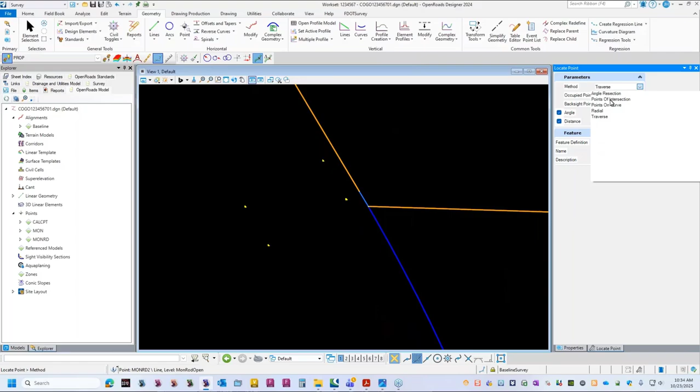That's what I wanted to show you, a couple of the functionality of these points. So there's those points. There's also, if you look at the mode, you've got a couple of other things. You can do a point of intersection, you can intersect some points. You can do a point on a curve. Now this is a little misleading because it's talking about establishing essentially a radius point. So if I say point on curve, pick this point, that middle point, and the end point down here, it's going to essentially do an intersection to establish the radius point. If I left click and accept, it'll put a radius point down there.

So these are some of the tools that you can use. The radial traverse you've seen, the angle resection points. It's pretty easy to use. You can always go to your help, go to your points, and they will explain exactly how to use these tools. Okay.

So I'm going to create a parcel. One of the things I wanted to do when I created that parcel was show you another functionality of the geometry builder, pretty handy. So I'm going to make a point. I've still got this as a property line, so I'm just going to make a line here, and I'm going to draw some lines. I'll draw this line to this line. Oop, I missed somehow. This one to the origin. When you see the origin and left click, it's there, it's on that point. Okay.

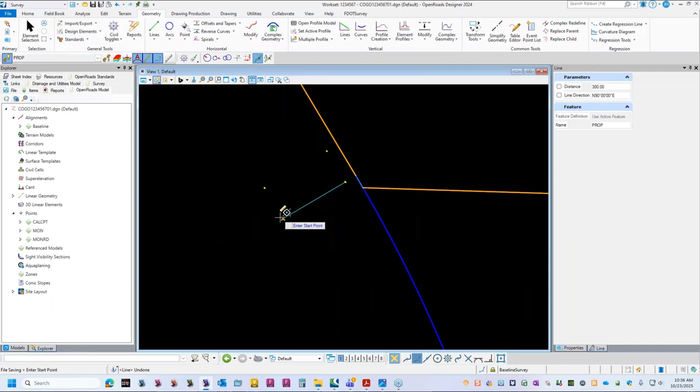Other things you can do, you can annotate automatically, and you can draw those lines automatically with this tool up here. So if I draw this line here to this point, it's going to automatically annotate, and then it's going to prepare me for the next call. I don't have to do the tool again. See, so I can do these like this, for instance. And so I've got a parcel, so to speak.

And the nice thing about the geometry builder is it's got an insert tool. So let's clear this out. I'll delete it all, yes, and we'll start a new event here. You got to watch out, I don't want to save it under unrotated. This is where you would mess up if you don't look out. Let's see, I'll dock it right here for the moment, see if I can get these in here.

I'm going to put in, so I'm going to use this tool right here, this insert element. If I insert it from this direction, if I hit it down here, it's going to go northeast. If I hit it, it's going to go in the direction of southwest. So if I left click, see it says southwest 300 feet. I can select the next one right here. Left click, it's going to put it in there. Left click, those.

It'll put that one in there, and then the last one is here, and it's going to put that in there, and it did some funky things right there.

I want to clear this out and show you one other thing you can do. You can go up here to this, make a complex shape out of it. Okay, and you see the directions, it puts an arrow in the direction it's going to go and where it's going to start. So if I'm at this end, it's going to go down. So right here, I want to start here. So I'm going to complex this shape, this one, and this one.

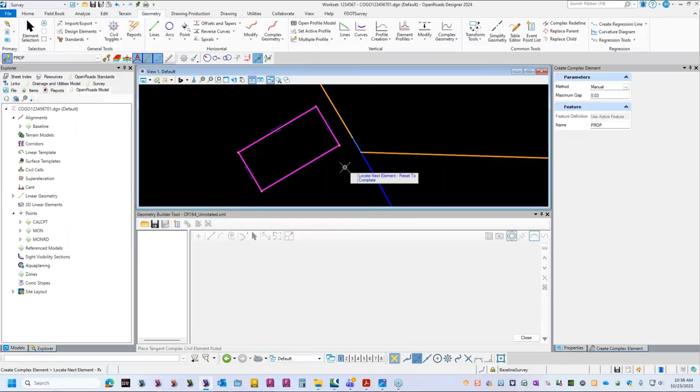Right click, and now it's a complex shape. If I look at it over here and look over here in the properties, you'll see it's a complex element, and it has a name, and I could actually rename this, as I selected it right down in here. And now I could do a new event and insert this entire thing in the geometry builder. See, so you can do them one at a time, or you can do them all.

One of the things that I did note that you don't see here, you don't see the closure reports anymore. So that's going to be just under reports. I would probably save this. I wouldn't want to save it under 164 unrotated, that's a different XML file. So I'm going to save it as parcel.

How about 100? And I'll close it. It's going to ask me if I want to save it. So if I look at my file, I've got a parcel 100 here, and the difference between - I'll get that in a minute. These are XML files.

So if I open these files, say I open with Notepad++ and look at them wherever it opens, you're not going to see a header up here. So these XML files are specifically formatted for the geometry builder. Just important to know, because that'll come into play at some point.

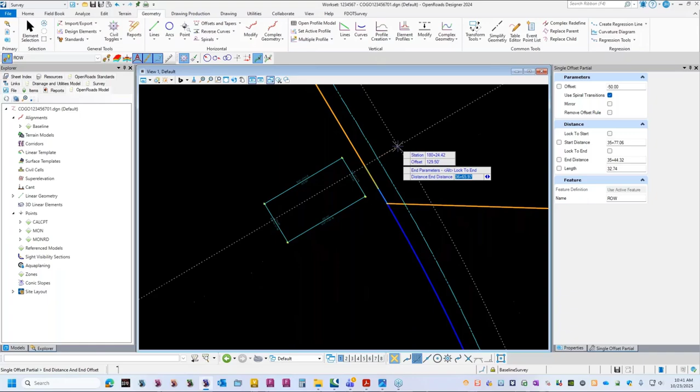Let's do this again. Try this. Offset partial. Just do it like this, it's the easiest way without that Civil AccuDraw on there. So I want to go, I want to start here. So I want to start maybe at this monument right here.

And I want - that's where I want to lock that. And I want it at distance. No, I don't want that distance. Let's do this again. Select it. Okay, it's going to start not off that.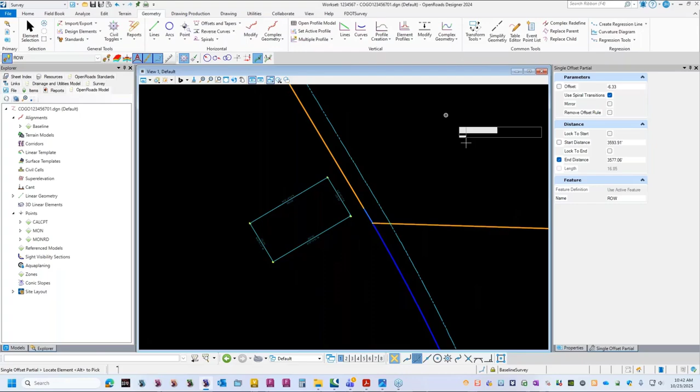Sometimes this thing can be a little cantankerous. There. Now the element, I want it 50 feet, so I'm gonna lock that. And I want it to start right here. And I want to run up to this point. And it didn't do it the way I wanted to do it.

Not sure - 50, just ask me where I want to start. Oh, I need to practice with this one. It worked perfectly earlier. Let's see. So off this element, 50 feet.

Station - this is the thing, this is a problem right here. I don't want any of these selected. I want to offset 50 feet. And I actually wanted to put that in there too. So that's one of the things that's confusing me here.

Look at your thing - so I want to start here, and I'm just going to move it to here. That's really the easiest way to do it. You got to watch those settings over there. So what happened was I had a bunch of settings set over here, and it was locking it down. So that's how you can set some right-of-way lines.

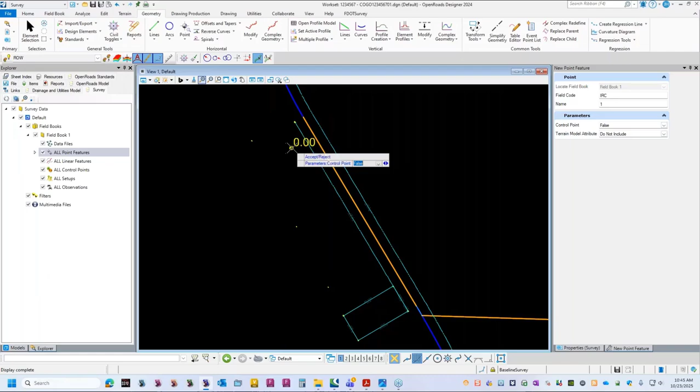And then I'll just put some points out here. Let's just say there were some iron rod caps that were found right away. I do not want that on - control point, do not include, it's not a control point. So I just put a few points out here. Pretend that we found some points, and let's see, so maybe some stuff near the right of way.

How about that? We found some iron rods out there. The reason I wanted to show that is because I want to show you a tool, another tool under geometry, and it is my point filter tool right here.

Okay, when you pull it up, it's going to show you. I can shut this down a little bit. It's going to show you all the points in the file. Now you can inverse, you'll see I put some iron rod caps. You see it didn't increment exactly the way I wanted it to, but it did increment.

You can show just your survey points. You can show just your 2D geometry points. There are things you can do in here. If you have a file referenced, it will also show up in your point filter. You can exclude 2D points and or 3D points, okay? And you can refresh in case there's new points put in and you don't want to close it.

Here you can enable fit view, so I'm on calc point with no number, that's that point right there. And you see it's got a little blue circle on it. That's because I've got both the locator and the direct decorations on. I don't necessarily need to show the X and Y, I can turn that off.

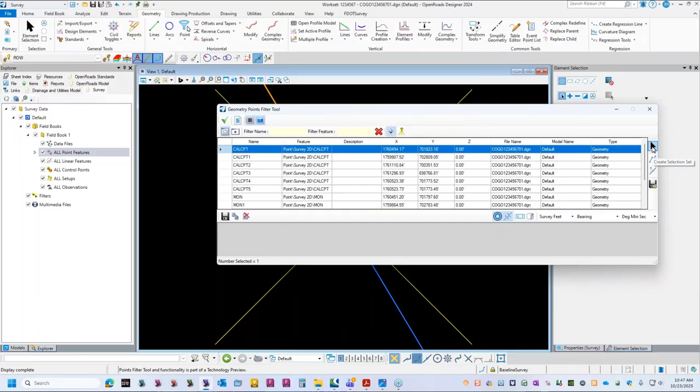And then over here, you can create a selection set by just selecting points, and then you can use your inverse tool, and you can use your station and offset tool right here to do that. So if you're just going to inverse from 1 to 2, you would select those. I'm going to put control 2.

It's moving around because I've got these locators on. I'll turn this off for a second and hit inverse, and it's going to show you a direction inverse. It doesn't have to be to the same point, it can be like, let's do this one and monu 1, hit inverse, and you can see how it does that. You can do multiple inverses, so it'll do both of them at the same time.

And also you can do station and offset, so it's going to ask you what alignment that you're stationing offset off of, and you pick your points, say control points, something like this, and hit station offset, and it's going to create a report is what it's going to do.

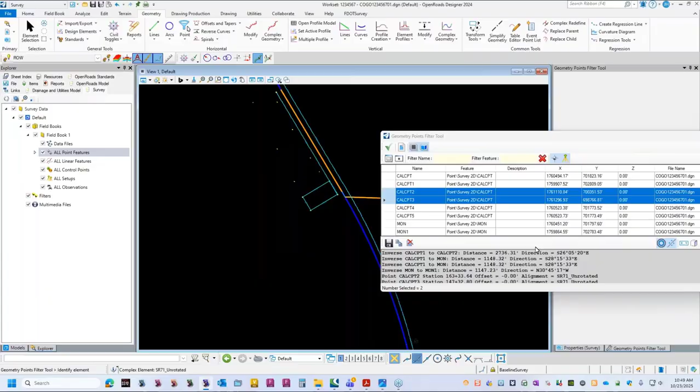And normally it does show station offset though, right there. Put these back in here. Oh, there they are. So you see what's happening, it's doing down here, showing station offset of those points that I have selected, which are right on the line.

I want to show you a couple of other tools. So that's that tool. I want to show you under report, I want to show you some reports. Okay, first of all, let's see, there's a map check report.

Let's select this thing right here. Right click, it's going to come up with the map check. So it'll tell you, it'll give you your northing and easting coordinates and give you your closure and your area for your map check report.

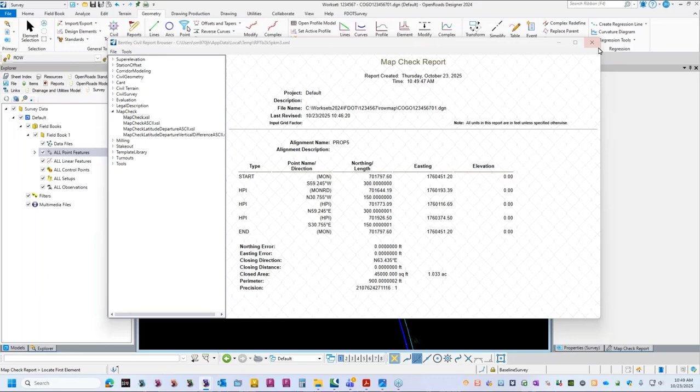Okay, these are styles, so these reports can be in different styles. You can also turn around and change the format options if you need to. You can save as a Word document, for instance, so you can save your parcel

100, for instance, as a closure report. So you could go around and get real nice reports on there. There's a few others I wanted, there's another one I wanted to mention.

If you select your alignment, so let's just select it and I hover on it, I can also do reports from there, or it'll give me a horizontal geometry report. Again, this might be something that you want to save as maybe a Word document or an XML. So I'll just say SR71 and hit save as a Word document there.

And then the other report I wanted to show you is this point feature station offset elevation report. So it'll do all of them. You choose your baseline, it's got to be a baseline, and you choose your points that you want to be in the report.

You can also make selection sets ahead of time, there's different ways of doing that. I'll just show you a couple of things you can do. How about some of these monuments? You could also just surround them as a selection, that's good enough. And if I right click, it's going to give me the station and the offset of all of these points.

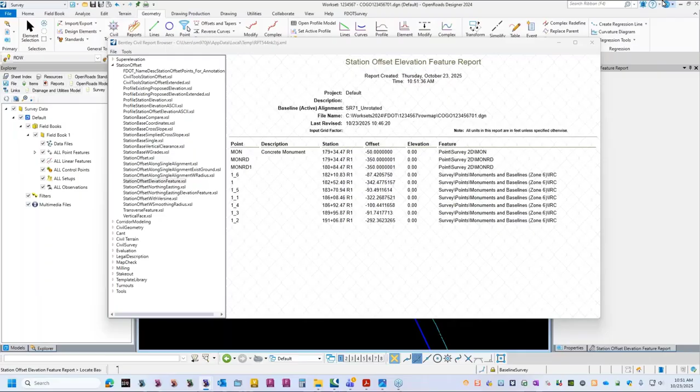And then again, I can save that if I want to. There's various ways of creating selection sets. In the survey tab, go to field book and details. You can select them all right here, go down, select this, and right click and choose selection, create selection set. So you can get all your survey points and do your offset report based on that.

Another way to get points: if you go to OpenRoads Model, you can see your points down here and select them this way, and that'll create a selection set. So there's different ways of selecting and looking at them and creating these reports.

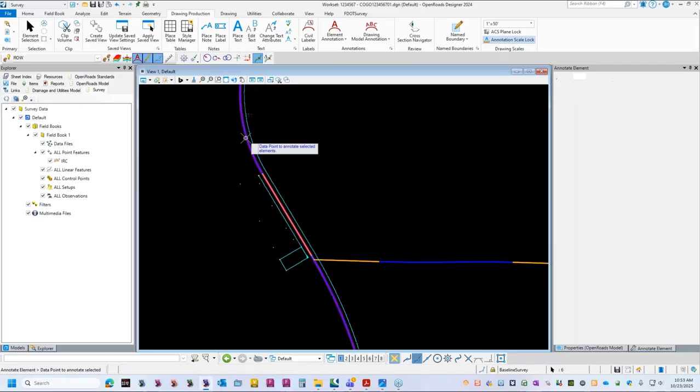One of the last things I want to show you is the annotation filter for these alignments. If I go up to drawing production and select annotation, I select what to annotate, it'd be this alignment. I go to element selection over here. I didn't quite catch it, did I? Okay, there you go.

And annotate it. It'll ask me, there is an option for overriding. So I could select that override, and that's what I'm doing. Otherwise, it's going to give me the roadway version of the annotations.

So I can dig down into this. I don't want point, I want linear, and I want right of way. And if I dig down deep enough, I'll select the right of way center line baseline right here, and let it choose that, and it'll do it.

So now when I left click, it's going to take a data point to annotate, and it's going to annotate at the scale I have, which is set to 1 inch equals 50. But it's dynamic annotation, so I can change this. I'll change it up to something around a couple hundred so you can see it.

And it does that. Now let me go up higher, all the way up to 500, which would make it kind of big. Let me do the same thing, select this one right here and annotate it with this right of way center line. So it's a little messy.

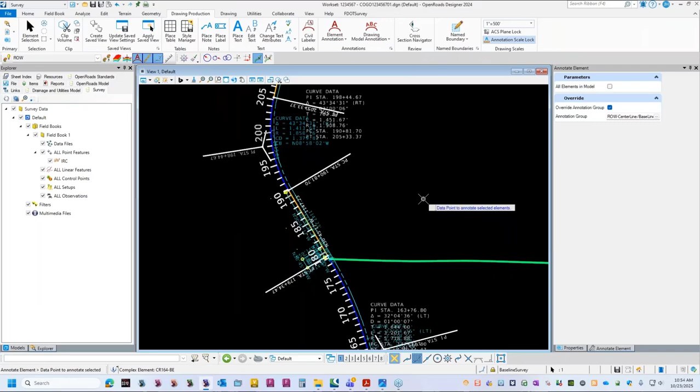Data point to select and annotate it. So you see at 500, it's got too many tick marks. CAD support built filters for this — if you look under the FDOT survey or FDOT tab, go down next to the create file, there's a filter. CAD support built these filters to just turn on some levels. So there's the 100-foot level filters, or I could put the 500-foot filters. And now you notice this looks much better.

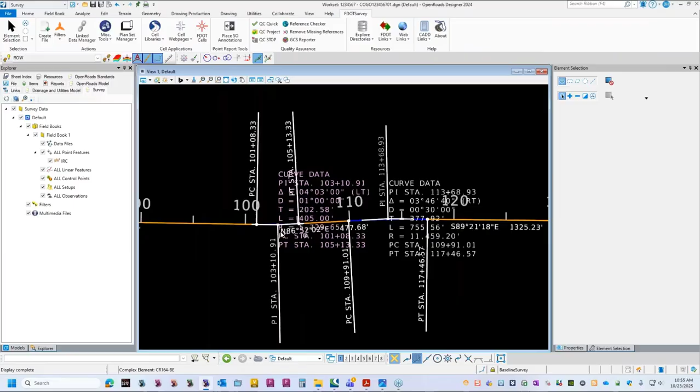Some of the things I didn't do down here that I'd like to show you — there is a station equation at... let me look. It's at 171. Actually, it is at 127. So do I have a 127 station equation? I have moved — oh, I haven't even stationed this thing properly. That's the reason right here.

So let me go up to geometry. I'm going to start the station here at 0. What is the name of this? It is 9 plus 54.67. Okay, so what that's going to do is dynamically change my station.

So here's my 127.01. This is where my station equation belongs, and it's pretty simple to do. You add the station equation right here. You locate the element you want to put it on. Where's the station equation going to be? Well, I've already got it at 127.0124, it says there, so that's where I want it. And it's going to ask me what's the ahead station.

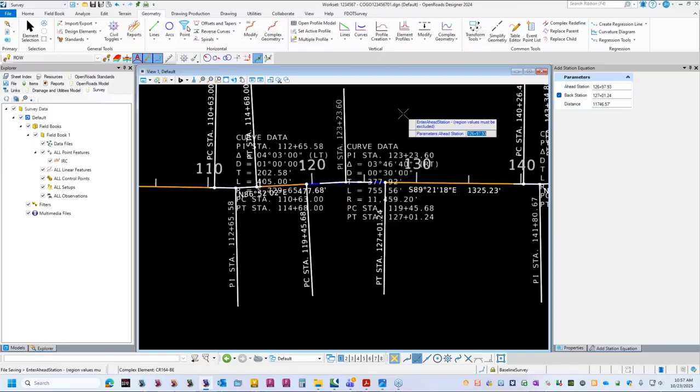So my ahead station is 126+97.93, I'm just looking over the other page. And if I put that in there, you see what it did? It restationed and now has a back station and an ahead station. So I am fully annotated, fully stationed, and I've got some monuments put out there, put a parcel.

We looked at all the tools that we need to look at.

The only other thing I haven't done, and it's almost time, is I haven't imported or exported these alignments. I think it's important to know that you're going to need to do this. So if you export geometry, you choose the type - I'll choose Land XML. You also have IFC, but the problem with IFC is it does not incorporate station equations. So if I saved this alignment as an IFC and put it back in, there would be no station equation. So I tend to go to Land XML.

I can reset to complete. It's going to ask me which version - I'll say 2. Active profiles, no. And then I would put SR71. I always, if it's a Land XML, put the word 'land' in front of it because it's a fundamentally different XML file, and you won't know the difference just looking at them. So I'm going to save State Road 71 as a Land XML.

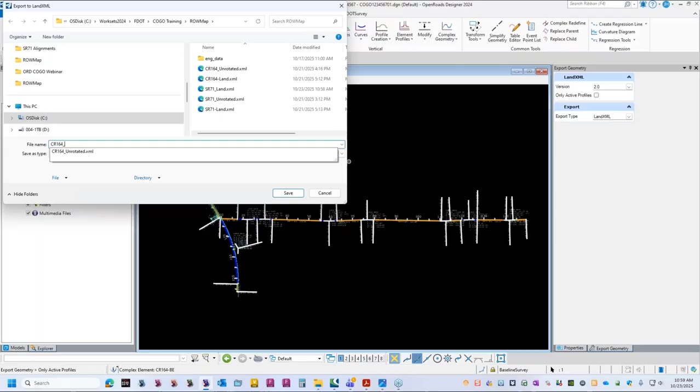And I'll save that. Now I have those parked out here - where did I save those things? I bet I saved them in that previous file. I was working in one earlier, and it was this one. I bet I just put my Land XMLs here somewhere. No, not there - where did I put those things? Select it, export. Where did I put them? Oh, I put it in my COGO training.

Okay, so right nearby - right here, COGO training, under right of way. And I just created that. You can see 10:58, this one here, and I'll copy these two, cut them out. Move them back up where they're supposed to be. Paste. And what I would do is, now that makes these portable.

And that's pretty much ends my webinar. It's 11 o'clock. What you would do is take that Land XML and move it to a SURVRD. We don't generally annotate in the SURVRD. We also would want to put that in an ALGNRD so it would get annotated there, and roadway would take it from that point. It could also go in a right-of-way map with these types of right-of-way annotations. So that is my webinar.

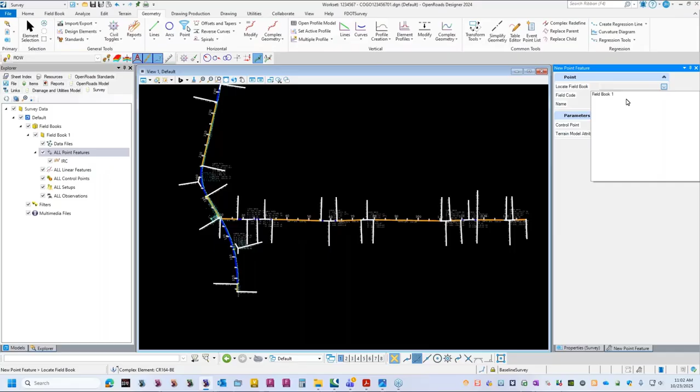No. That would be - first of all, they're 2D, so they don't have a vertical component. A field book is points and chains - survey points and chains. So the only way I would know how to do that is by creating new points right on top of those points. I would go to my field book, say all points, go new, and then go find my point - locate the field book and find that point and put it in there. I really don't know of another way of doing this, although it will take the MON feature.

So the field code would be feature, point name, say 100 for instance, and I would put it right here. Just to delete this to see what's in it - I just deleted it, and this one actually is 0.100 monument right there. So you see I did put it in, and it is in the field book - you see it right here. Not a good way to do that.

If you have a GEOPAK file, there is a way to bring the GEOPAK file directly into a field book. It'll only bring the points and the chains, but you can bring a GEOPAK file into a field book. I do have a method for doing that.